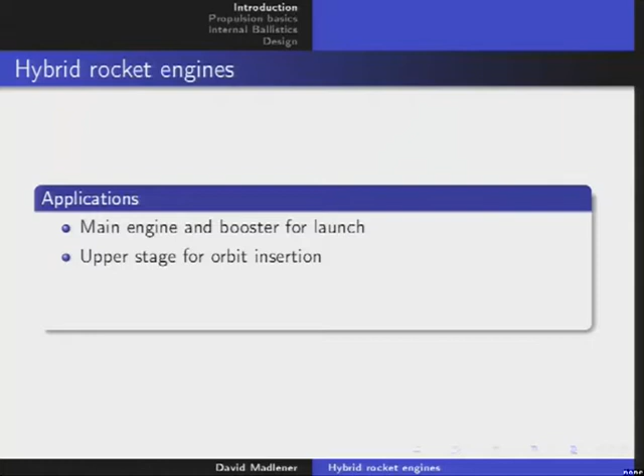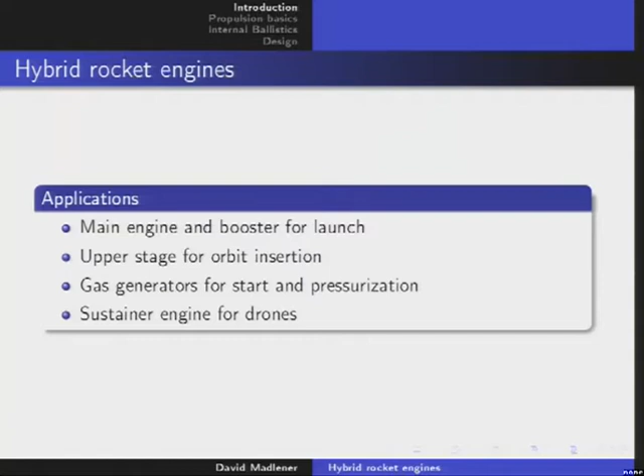It could be used for upper stage, for orbit insertion. It is often used as a gas generator, to start another engine or to pressurize tanks, and sometimes even as an extinguisher. Very important today in the military or for amateurs, for unmanned aerial vehicles, it is used as a sustainer engine for drones because it has a very long burn time and you can throttle the engine.

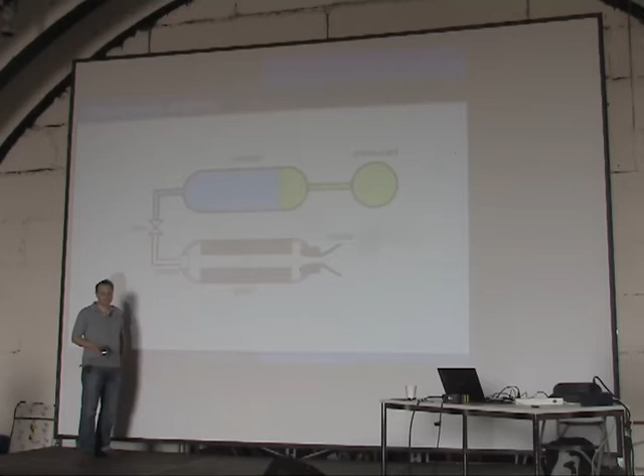So the main part of the hybrid rocket system is the burning chamber, then there's a valve. The valve has to work at cryogenic temperatures if you are using cryogenic fluid, so this is the difficult part. If anybody remembers, Copenhagen Suborbitals launched their Heat 1X this summer, and the previous summer they tried - the main problem was that the valve didn't open because it was frozen. This happened to us too.

Then we have the oxidizer container - that's normally a fluid like liquid oxygen or something like that, and then we have the pressurant. So if we build an engine, we have to feed the liquid into the burning chamber at a certain pressure - normally the higher the better. The problem is, of course, that you have to somehow put pressure on this liquid, and there are two ways to do that: you can use a pump, or you can pressurize it by a gas. So this is the main principle.

This is very simple. If you use a pump, the pump assembly would be here, and it would be the most complex thing, so amateurs normally tend to use normal pressurization by gas.

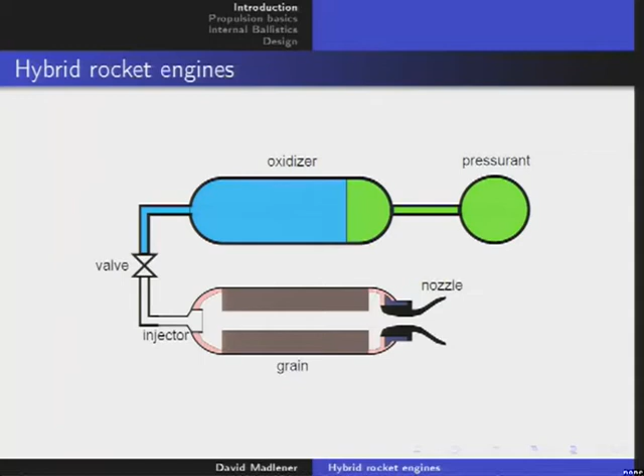Okay, that's the principle. So what are the pros of this design? There are many pros. First, it's inherently safe. That's something really nice - hybrid rocket engines cannot explode by itself, like for example solid engines, and they don't do hard starts like liquid engines, and they don't burn up in flames and devastate everything, your test stand and even people, if you use the right oxidizer.

There was an accident with - what's the name - Scaled Composites, where they used nitrous oxide, and this is a monopropellant, and they did something wrong. There was some cavitation and it exploded, and I think 2 or 3 people died. But normally, hybrids are very safe.

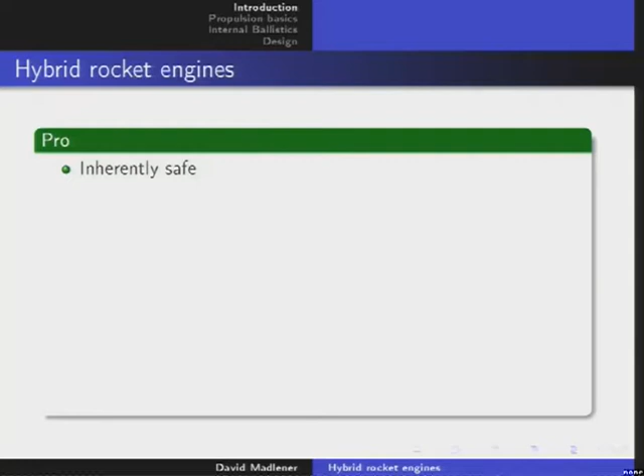So it's environmentally clean if you don't add any strange metals like beryllium or something like that to the mix. It's a proven technology - as I said, there were applications trying to make a launcher, and it was working. And it has been researched since the 1930s, so it's nothing new.

The grain is very robust, so it doesn't matter if there are cracks or bubbles inside, unlike a solid rocket engine where you have to take very much care about looking at the structure of the grain, with X-ray or so. In hybrid engines, the grain could have bubbles or cracks, it doesn't even matter. So that's the feature why it's inherently safe.

It has medium ISP, between 150 and 300. You can go a little beyond that limit, but you have to use very exotic oxidizers and fuels. It has easy throttling, you only have to throttle one liquid, as opposed to bipropellants, where you have to change two liquid streams, which is much more complicated. You can shut down and restart the engines easily, compared to solid engines that are very difficult to restart and shut down. And it has reduced complexity and low cost compared to bipropellant engines, because the feed system only has to transport one liquid, and you don't need mixing aggregators to mix two propellants.

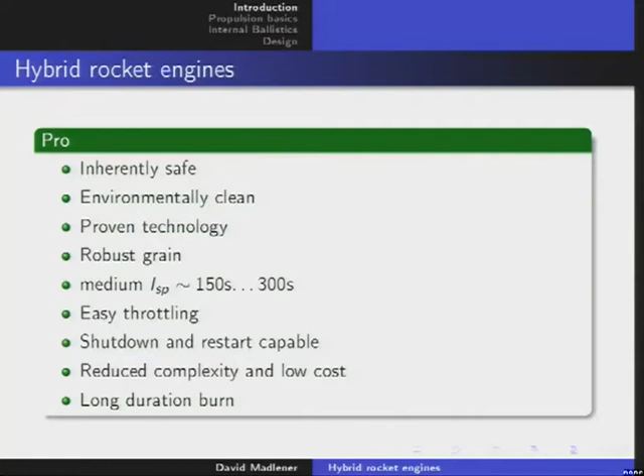Another feature is it has a very long duration burn, and that's why it's used in test drones in the military and for UAVs. You can burn for 20 minutes or so if you want to, or longer.

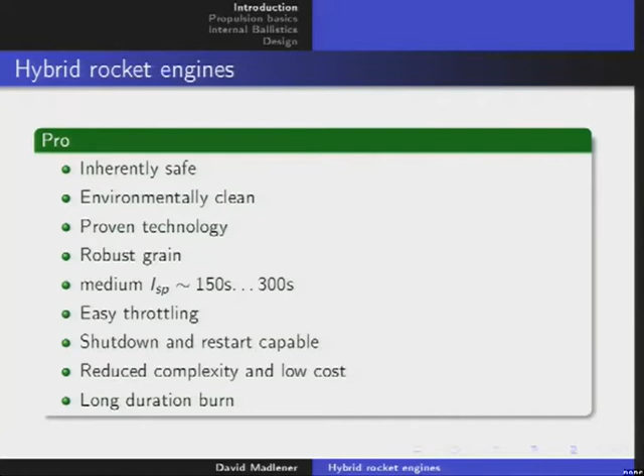So there are some drawbacks. If these drawbacks weren't there, they would be using hybrid engines now, but they don't. So why don't they use it? Well, there's one problem, low regression rate, that in turn brings the very long duration burns. But if you want a very short burning time, so a lot of thrust, then you have a problem. But you can counteract it.

One way to counteract this is to use multiports. The second way is to use special fuels that have a very high regression rate because they have low viscosity when they melt, like paraffin. So there are additional effects that transport the fuel into the burning chamber.

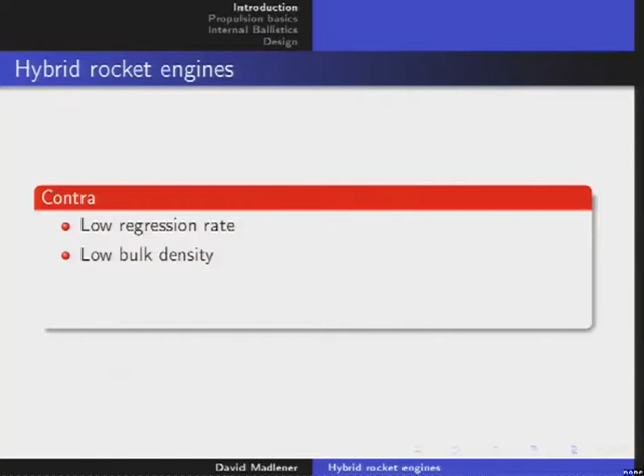It has low bulk density. That means a hybrid rocket engine is normally very large. You cannot build very small engines like bipropellants. So they are always 1-2 meters long because they need the mixing time. That's due to the process of burning.

And they normally have a low combustion efficiency, a few percent below bipropellants, but they are better than solid rocket engines. To improve the efficiency, you have to add certain mixing elements like diaphragms, to make something like an afterburning by producing vorticity. And this adds additional weight to the system, so you have to build it bigger.

Another problem is the shifting O/F ratio, that is the ratio between oxidizer and fuel, because as the port increases in size, everything changes. The working point of the engine changes, and you have to counteract it by controlling. But with today's electronics, this shouldn't be a problem. So these are the main drawbacks used against hybrids, the real reasons they aren't in wider use. If you want to make a working system, you have to address these four points.

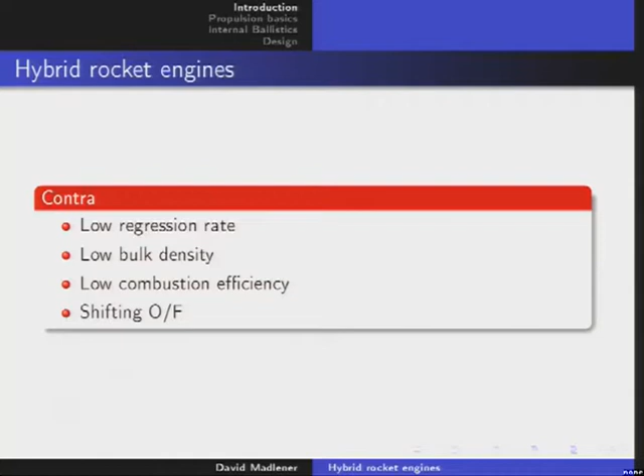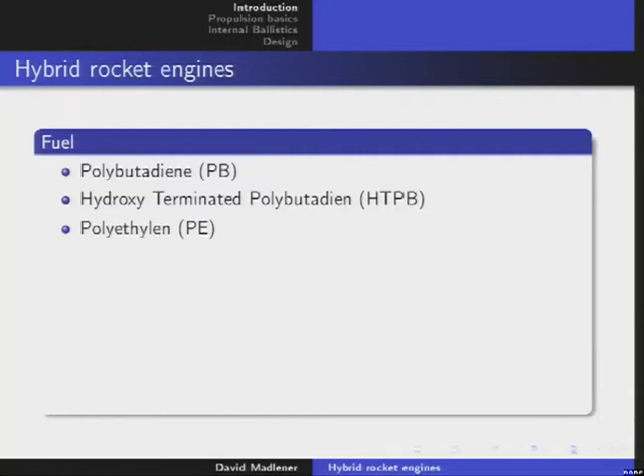So let's look at the fuels normally used. You can use any polymer, but one of the first, when they were available, was just rubber, polybutadiene. Today it's mostly HTPB, hydroxy-terminated polybutadiene, which is just a more viscous, faster burning rubber. But you could just as well use polyethylene, we use that too, amateurs like to use that. The problem with polyethylene is that when it melts, it expands, so it deforms. Then you could use polypropylene, which is nearly the same.

What's very nice is to use PMMA, polymethyl methacrylate, which is transparent, so you can watch the burn while it's working, and estimate parameters in the burning chamber by optical inspection. Then what we used was polyurethane, nasty stuff, but very easy to process. Then some amateurs use PVC, polyvinyl chloride, which is really nasty because it produces chlorine exhaust, but is readily available in every hardware store.

A very good propellant that some guys in our group investigated too is paraffin, or you can use very long alkanes, asphalt for example. This gives a very high regression rate, so you can get very high thrust even using one port, reducing the complexity of the engine.

A very exotic fuel is pure lithium. There was a program in the 60s, beginning of the 70s, where they used a pure lithium grain together with FLOX, and it achieved, I think, a vacuum ISP of 380, nearly that of a good bipropellant.

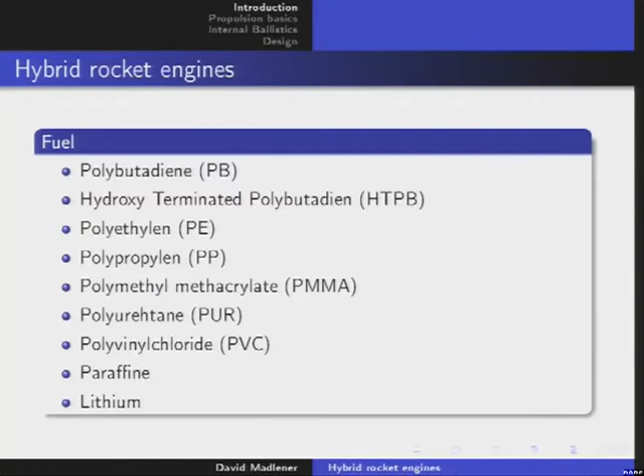So what oxidizer is normally used? Well, we use liquid oxygen, and it's, in my opinion, the best oxidizer there is in the world. But there are other opinions.

You can use gaseous oxygen, but this is only for test stands because the density is too low for the engine to work in a real application. Most amateurs use nitrous oxide.

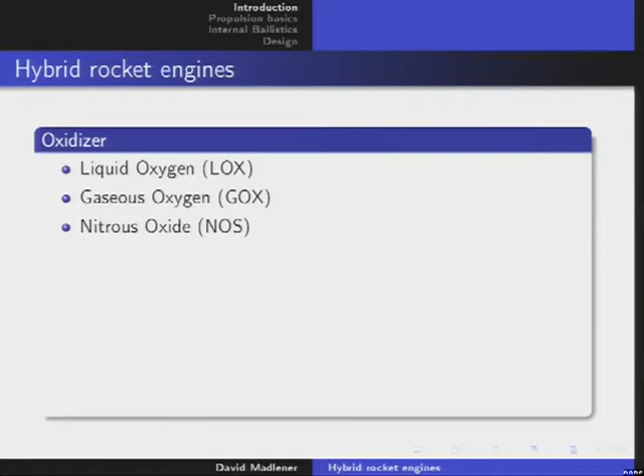As I said before, nitrous oxide is a monopropellant, so you have to be very careful about your injector design and feed system, not to create conditions where cavitation could occur, because this stuff can blow up with no notice, just blow up.

Then there is a very interesting substance called red fuming nitric acid that you can only use with a bunny suit, a moon suit, otherwise you get burnt. You have to use a gas mask. But otherwise it is a very benign substance, so it doesn't explode by itself. It just burns everything in contact.

And this one produces nitrous gases, so it's red fuming. It looks like it's coming directly from hell. This one is not so dangerous in the sense that it doesn't produce so much fumes, but this thing corrodes everything. So you put it in anything that's not specially suited, like with Teflon or so, and it will corrode everything.

Hydrogen peroxide is a very interesting oxidizer, true. The problem with hydrogen peroxide is that it has a lower specific impulse because it produces water in the process. But it is very, very nice as a monopropellant. And there are guys that use hydrogen peroxide for hybrids.

Then there is dinitrogen tetroxide. This is normally used for military applications. It's a storable compound, a liquid gas like nitrous oxide. It's very similar, it's just adding two atoms together. And it's what makes the red fuming nitric acid red, essentially.

Then we have liquid fluorine, which is something very, very, very nasty, and you don't want to work with it, but they did. And even worse, liquid fluorine plus oxygen, called FLOX. As I told you, this FLOX was used with lithium to produce a hybrid engine that achieved about 380 seconds in the 1970s.

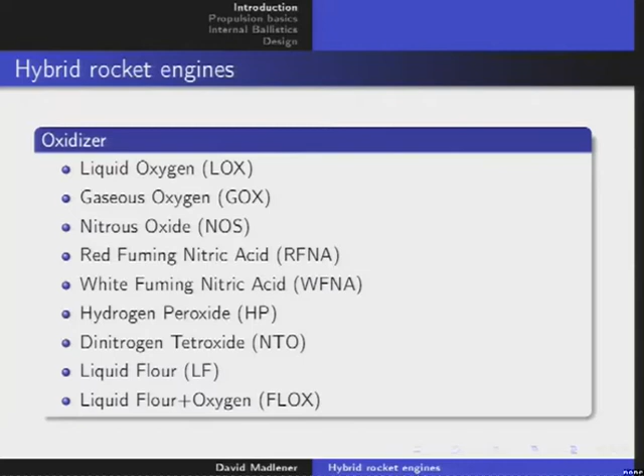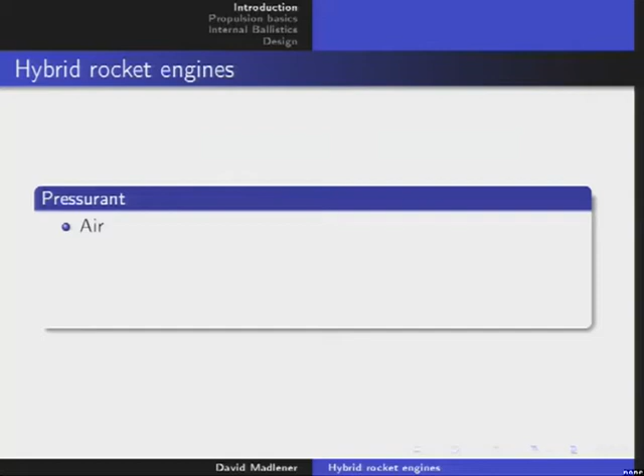Then as for pressurant, there's not so much choice. Normally you can use just air, compressed air. The problem is that compressed air contains oxygen, and if you let it flow through a feed line where there's some inhomogeneity, some crack or something like that, you can have an adiabatic shock. At that point, it heats up and just ignites, and then you have a nice burning facility.

So it's better to use nitrogen. It's totally inert, it's very cheap. The problem is if you work with cryogenic oxidizers like LOX, then the nitrogen will go to the liquid phase, so you have to put a lot of nitrogen in it.

Then you could use helium, which is normally the best choice. The problem with helium is it's very expensive, and it goes through everything, so you cannot store it for a long time. You should just buy it and use it up in a short cycle, otherwise maybe only half of the helium you bought remains.

What's very interesting is that there are people who use helium together with oxyhydrogen. Oxyhydrogen as a pressurant is somehow crazy, yes? But there are guys in Switzerland, SPL, and they take oxyhydrogen in a concentration that isn't explosive, very low concentration, and then they take the helium and expand it through a catalyst with the oxyhydrogen, so this reaction takes place, produces water and a lot of heat. So the helium is heated and you need less helium than just pressurizing it with room temperature helium.

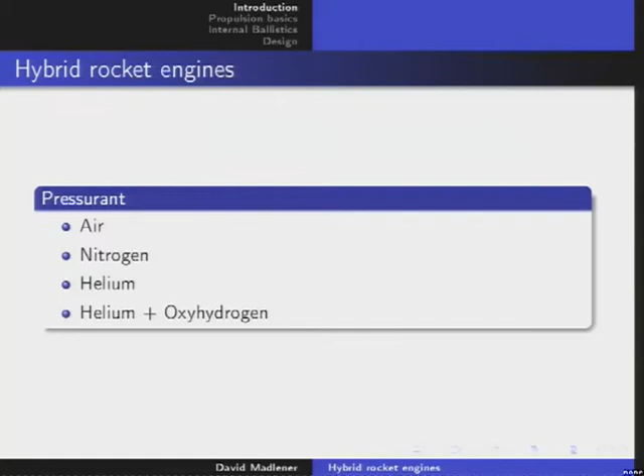Okay, so let's talk about the grains. Normally, you just use a circular port. This is the simplest port, just a hole, and it's like an inverse flame inside, like a candle, but burning from inside instead of using some string.

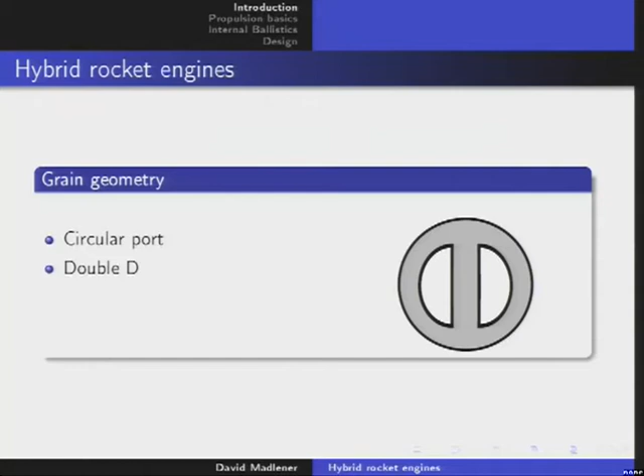Then there is the double port design, typical, so the double D. If you want higher thrust, you have to add ports, which of course makes the injector more complicated. Then the 4-port, and of course the so-called wagon wheel.

This was the design AMROC used for their launching vehicle. The problem with these wagon wheels is when they burn up, these hollow regions expand until they touch, and then you are left with a web. At this point, you have to shut off the engine, otherwise the web itself will start to deteriorate, to burn up.

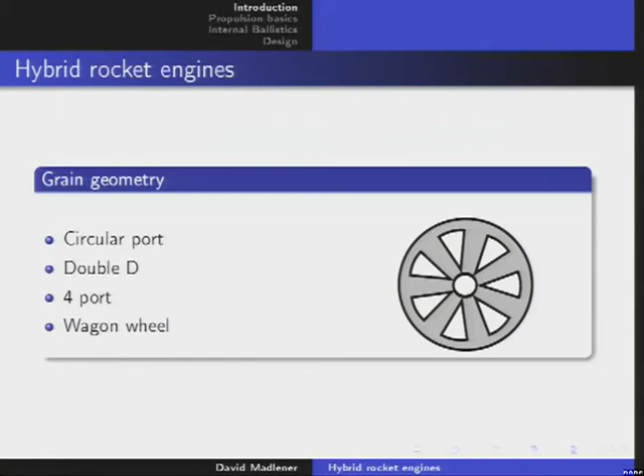And then small pieces will go to your nozzle at a speed of approximately Mach 1, so 1,000 meters per second or so, and will destroy the throat of the nozzle, thereby changing the flow, changing the working point, everything, and then deviating the rocket. So this is not a nice thing to try. These are the problems you have if you use fuel webs for multi-ports.

So now let's talk a little bit about propulsion basics. This is very basic stuff, and some of you may have heard it already.

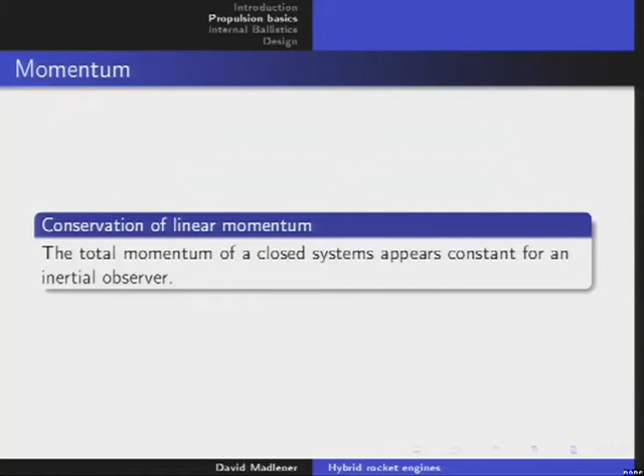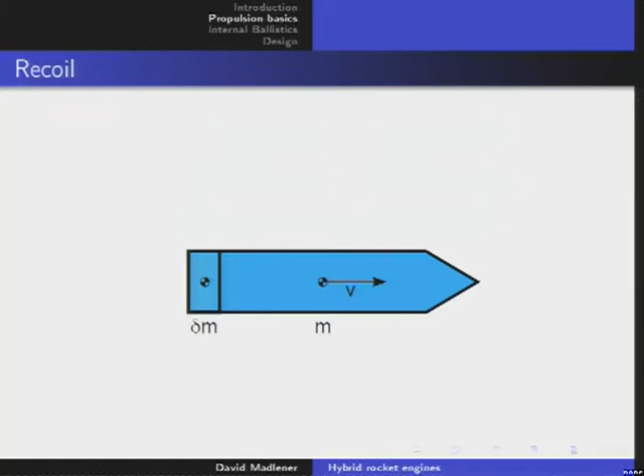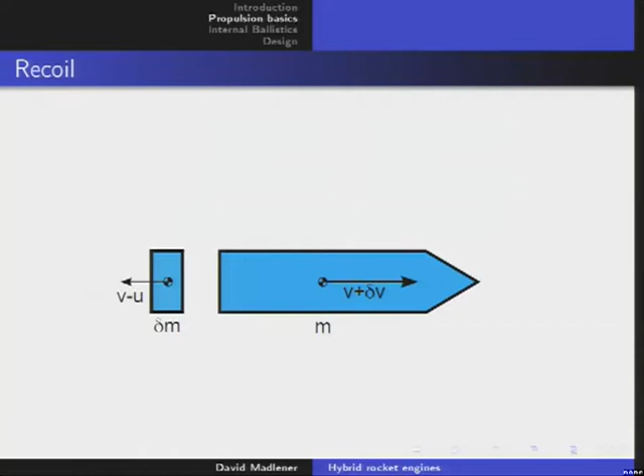When we look at a rocket, what we really use every time is the so-called conservation of linear momentum. For an inertial observer looking at some system where no external forces are working, this system has a constant momentum. So if you look at a rocket in flight with velocity v, we have two masses, the mass of the rocket and some small mass delta m that is ejected in a short time frame delta t. Then the momentum before the ejection and after the ejection has to be equal. So you can write down a little equation: on the left side, the momentum before the ejection, and on the right side, the momentum after the ejection.

You divide it by the time needed, delta t, and then you integrate it. On the right side, we have just the derivative of time of velocity integrated, and it gives us the difference in velocity between the start and the end of the burn. And here we have something more difficult: this is the so-called logarithmic derivation.

So when integrated, we get the natural logarithm in front, and we arrive at the celebrated Tsiolkovsky formula, which is the most important formula for mission planning. For every mission you want to accomplish, there's a certain change in velocity the rocket has to achieve to perform the mission, and it's called the delta V.

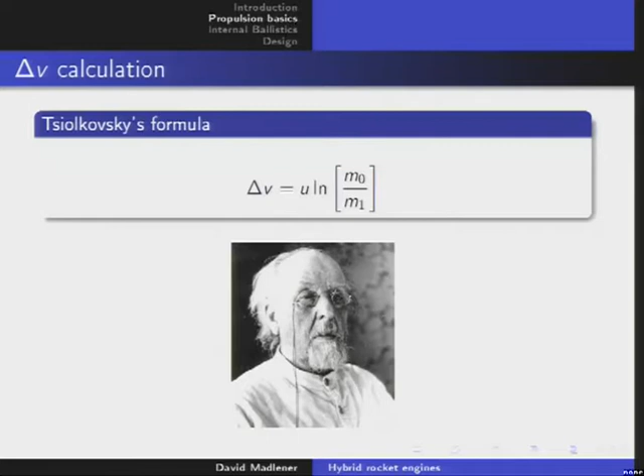So the delta V, as Tsiolkovsky found out in the 1800s, is proportional to the so-called effective exhaust velocity. This is the velocity that you propel the fuel, the burn gases, out of the rocket, behind you. Then there is a logarithm naturalis of the mass ratio. So the idea is first to propel the exhaust gases as fast as possible away from the rocket, and second, at the end of the burn, to be as light as possible, so you get a very high mass ratio.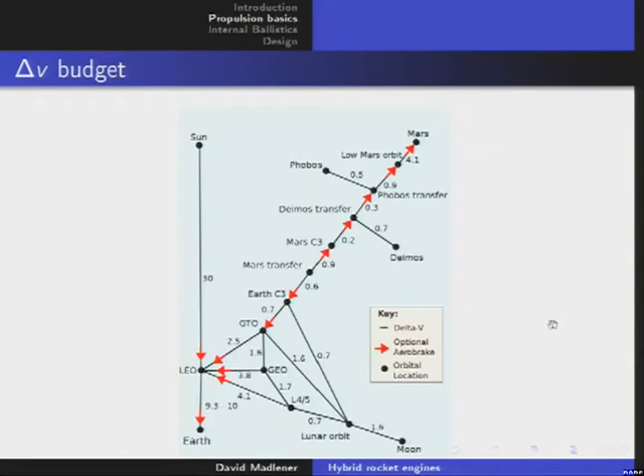And then if you want to go up from the moon, 1.6, and let's say we want to go to Mars, then we need about 3 to 4 kilometers per second, and the rest could be done by aerobraking. So to go from the moon to Mars is about one-third cheaper than going from Earth just to low Earth orbit. So it would be logical to first build a moon base, construct the spaceship there, and then go to Mars. It would be much faster, and the ship could be much bigger and take much more with it. And of course, they're planning on it.

necessary of about 100 or so to go to the moon. So it would not be possible to build one stage rockets to go to the moon. But by staging them, like in the Saturn V project, you can effectively add the logarithms, and you get

at least the mass ratio of the end configuration compared to the start configuration. So for example, for the Saturn V, the start configuration was in the order of over 3,000 tons, so M0 was about 3,000. And when it got to the moon, I think it was down to 40 tons or so, so you have a mass ratio of about 100. And then you get enough delta V to get to the moon and even back.

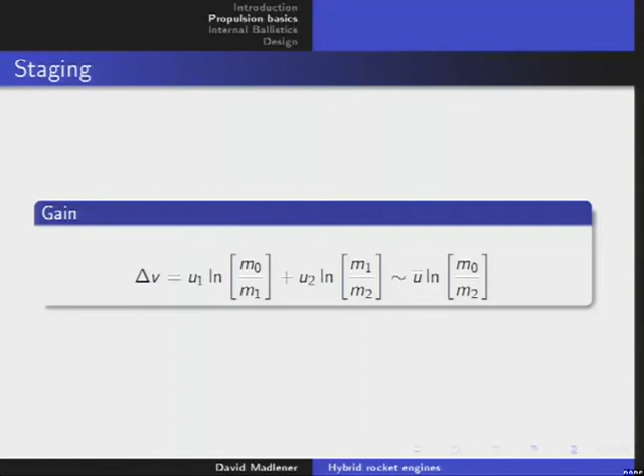Okay, let's talk a little bit of thermodynamics. This is necessary because I want to show you some formulas that contain a lot of signs that are very difficult to understand if you haven't seen them anywhere else.

So there are two laws in thermodynamics. The first law is: you can't win. And the second law is: you shouldn't even try. So the first law is about the inner energy that can only change by adding heat to a system or work, or extracting it to reduce the inner energy. And the second law states there is some strange state variable called the entropy, and it's somehow connected to the heat flow at a reversible process.

Okay, so energy and temperature. You may have heard about the Boltzmann constant - every physicist knows about it. It's a very small number, 10 to the power of minus 23. What it essentially says is, if you have a molecule or an atom at a certain temperature, let's say 300 Kelvin, room temperature, then you can calculate with this constant the mean energy per degree of freedom. Degree of freedom means the way a molecule can move, let's say in direction of X or Y or Z, or it can rotate around an axis. So for example, for a diatomic molecule, you would have 5 degrees of freedom, so you could calculate that one single molecule would have in the mean 5/2 kB T.

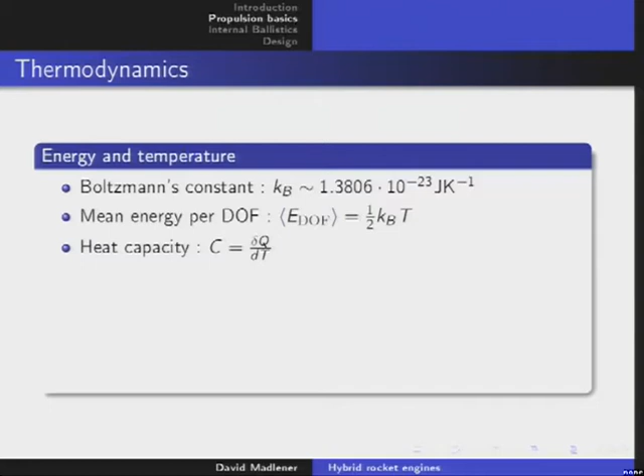So then there's another notion, very important: heat capacity. This is just, if you take any system, let's say this glass of water, and you want to improve its temperature, then you have to put some energy in it. And the heat capacity just says how many joules you have to put in to increase the temperature by 1 Kelvin. That's heat capacity.

So if you do it at constant volume, like for example doing it in a cylinder, then it's the heat capacity at constant volume. There's a very nice entity called the enthalpy, which is just the Legendre transform of the inner energy, and this leads us to the heat capacity at constant pressure. This is something that normally takes place in our environment - if you heat something, it always happens at ambient pressure, at air pressure, so it's at constant pressure. So what you normally measure is the heat capacity at constant pressure.

And there is something called the adiabatic index, gamma, or sometimes called kappa in the formulas, and it's just a ratio of these two heats. It's a number that is close to 1, always a little bit higher, so between 1 and 1.666. This is a number that is always used in rocketry equations, so don't be alarmed - it's a very simple number to understand. It's just some small number between 1 and 1.666 that describes the constituents of the gas that is exhausted.

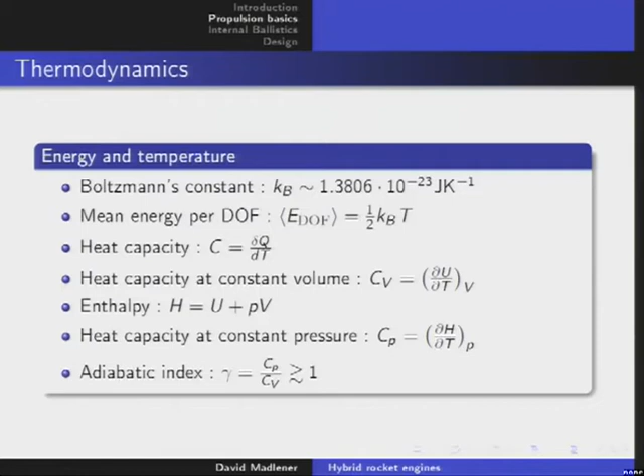So also, some chemistry - molar and specific quantities. There's Avogadro's number, which is just the chemist's way of saying a dozen. Yes, a dozen is a small number, 12, and Avogadro's number is just a larger number, but it has to do with 12, because per definition, the Avogadro number is the number of atoms in the isotope C12 if you have 12 grams of it. Very funny. So this is a very, very high number, and if you multiply it by our Boltzmann constant, which has nearly the same order of magnitude just in reverse, you get a small number, about 8, and we call that the universal gas constant. So just remember, R is in the vicinity of 8.

Then we have the amount of substance, just taking all the molecules and dividing it by this number. So instead of saying I have 12 times 10 to the power of 23, you say I have 2 moles. It's just like saying when you have 24 eggs, I have 2 dozen.

Then you have the molecular weight, very important for the formulas that will come. It's just the weight that 1 mole of the substance has. So you take 1 molecule, look at its weight, and multiply it with Avogadro's number, and you get some number in the region of grams. So for example, water, made of oxygen and 2 hydrogen, is 16 plus 2, so 18 grams per mole. So if you have 18 grams of water, there are about 6 times 10 to the power of 23 molecules in it.

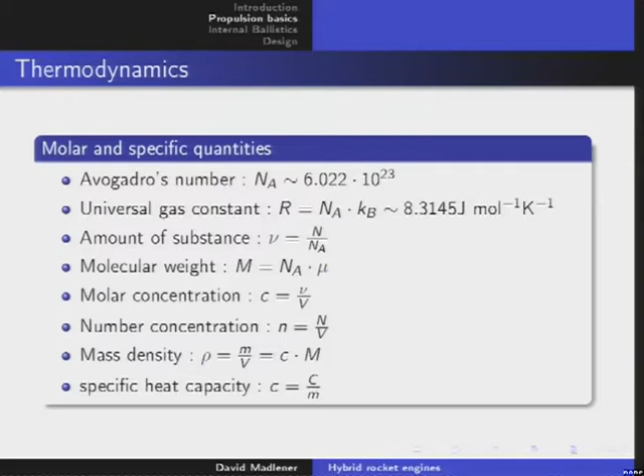So we have the molar concentration, this is just how many moles in a liter. Then the number concentration, how many molecules in a liter, the mass density, how many mass per liter, and the specific heat capacity is just taking the heat capacity of a system and dividing it by its mass.

Okay, so then something very important, the so-called velocity of sound. It's a very simple formula, and here we see for the first time the adiabatic index. For example, if you want to calculate the velocity of sound here in air, you put in the temperature that we have now, let's say around 300 Kelvin, then divide by the molar mass of air, I think it's in the order of 28 grams or so, and multiply it by gamma of air, which is in the order of 1.4.

And multiply it with 8.314, and take the square root, and you get about 340 meters per second. So if the temperature rises, the speed of sound rises too, so in a hot gas the speed of sound is higher. If the molecules of the gas are heavier, the speed of sound is lower, because the molecules have to be pushed around and they are heavier, so they don't want to be pushed around.

So if you take hydrogen, you'll have a very high velocity of sound, and if you take, for example, xenon, then it's very low. So for example, if someone breathes in helium - it's very high, you can also take hydrogen but it's very dangerous - so if you take helium, you have a very different sound.

They go up, they gain, and that's because of this velocity of sound, it changes. The velocity of sound in helium is much higher than in air. And if he breathes in xenon, then he gets a very low voice, because the velocity of sound is so much lower.

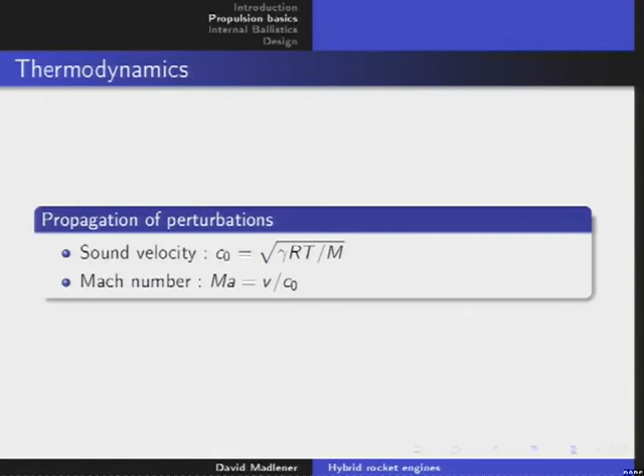Okay, let's talk about the ideal gas. I have a nice metaphor for it. Just imagine that you have N hooligans, and they are confined to a space V, and you make them angry with a temperature T. Then they will exert a pressure p on the environment.

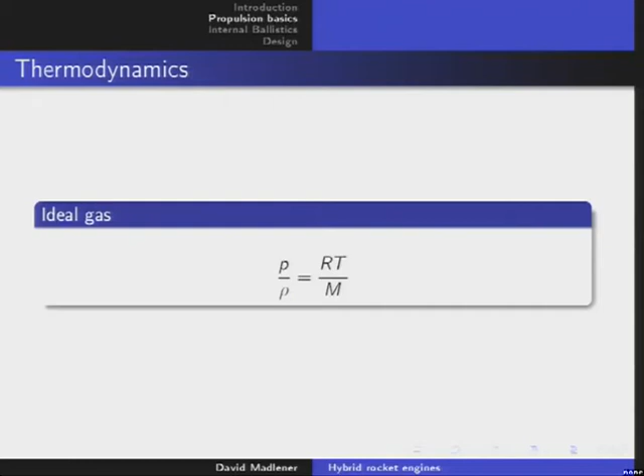So you just can divide it by V, then you have the number density of the hooligans, or you can divide it by Avogadro's number, then you have something that chemists like, the molarity, or divide by V, then you have the concentration, the molar concentration. And what is normally used in rocketry is this equation. So if you come around this equation, it's always the ideal gas, all the same. In this case it's the density rho, and the molecular weight m is now introduced.

So what are the properties of ideal gases? Well, we can calculate the adiabatic index because it's just given by the number of degrees of freedom plus 2, divided by the number of degrees of freedom. So if we have, for example, a diatomic gas, like in air, nitrogen and oxygen mostly, then the number of degrees of freedom is 5: 3 for the translation and 2 for rotation. So 5 plus 2 is 7, divided by 5 is 1.4. It's that easy for an ideal gas.

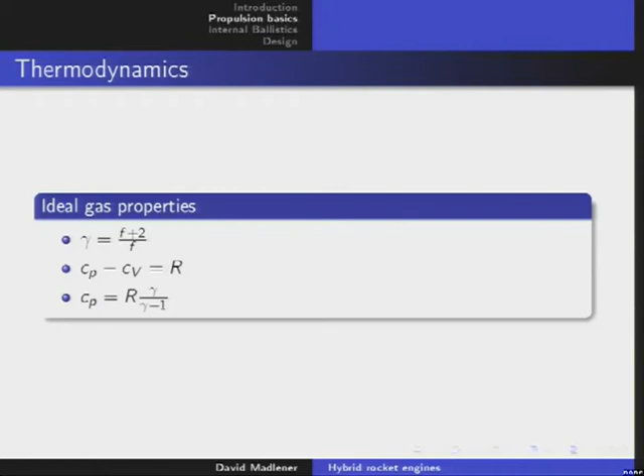Then the difference between the two heats at constant pressure and constant volume is just R, also 8.314. And you can even directly calculate Cp. That's very important because if we do gas expansion, which is what we're interested in with the nozzle, we can simplify things and get exact analytical expressions that we can just calculate, and then get the properties of the engine.

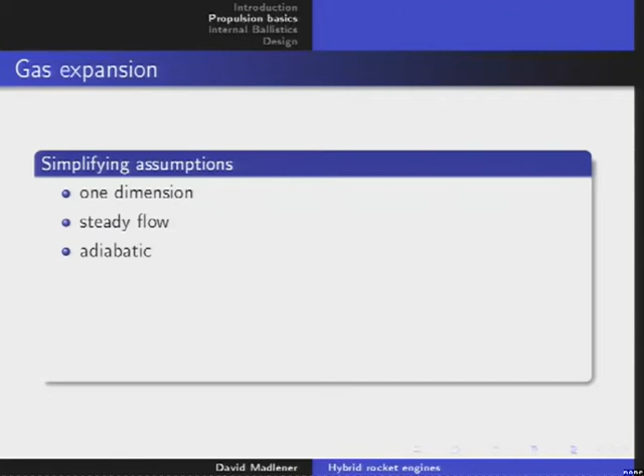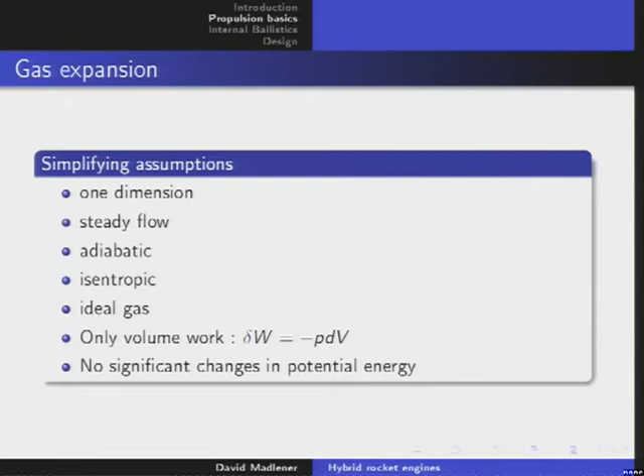So the simplifying assumptions are one-dimensional flow, steady flow with no change over time, adiabatic with no flow of heat, isentropic, and ideal gas. It's done only volume work, so the gas expands and works against the environment. And there are no significant changes in potential energy because our engines are normally so small that they are negligible.

If you do that, you get one constant of the motion of the gas, called the stagnation enthalpy. What you have to know is just that it is constant, and it changes with the speed that the fluid travels. So if you are at the stagnation point, this red point on an airfoil, the flow stopped here.

And everywhere else, when the speed gets up, then the enthalpy goes down according to this law. Interestingly enough, for an ideal gas, you can calculate the enthalpy by just multiplying the absolute temperature with the heat capacity at constant pressure, and we have seen that we can calculate this.

So this is an interesting formula because you can calculate the temperature T0 at the stagnation point, knowing the ambient temperature around it—for example, 300 Kelvin—and the velocity that the air is streaming. So if you have a foil, you could calculate the temperature at the stagnation point, or more interestingly, for rockets, you can calculate the temperature at the tip of the rocket.

You can see if V gets very high, let's say Mach 3 or higher, the temperature goes beyond 500 Kelvin, 600, 700, 800 Kelvin, so you cannot build tips out of aluminum, for example—it will just melt away. With this formula, you can calculate this, and you can calculate all the formulas I will show you now. This is the basis for all the formulas for one-dimensional flow in rocket engines.

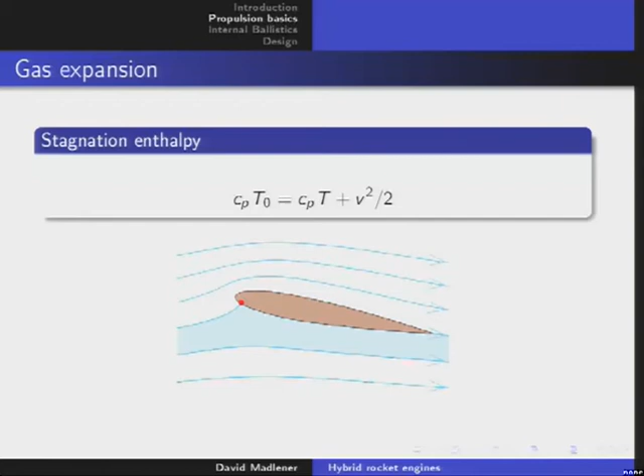So now, to the so-called de Laval nozzle, the convergent-divergent nozzle. This is the one piece of engineering that produces the most power on Earth. With this simple device, every normal power plant produces electricity—by expanding hot steam to very high speeds, you turn the turbine and then produce electricity. And of course, it is used in rockets, which are the most sophisticated and most powerful engines ever built.

So what happens is that hot gas enters the convergent section, then it speeds up, and exactly at the throat it reaches Mach 1, the local velocity of sound. After exiting the throat region, it accelerates even more and achieves supersonic velocity, maybe Mach 4 or 5 or so—the effective acceleration of the gas.

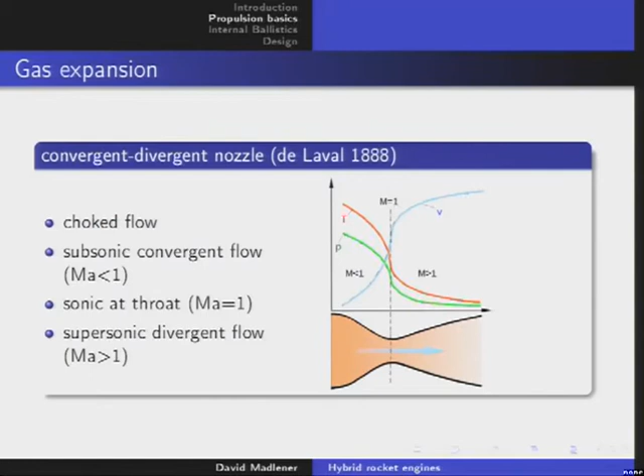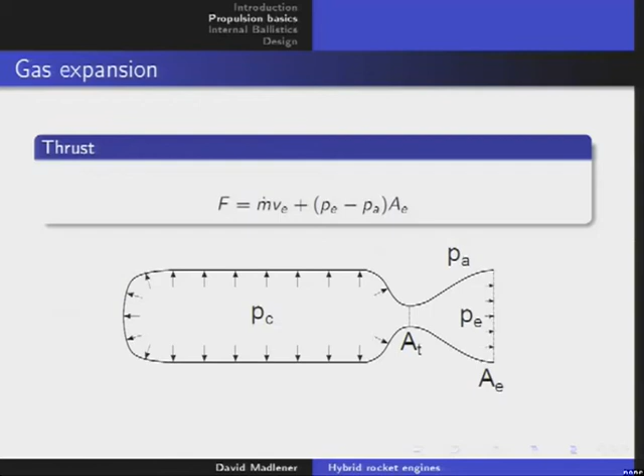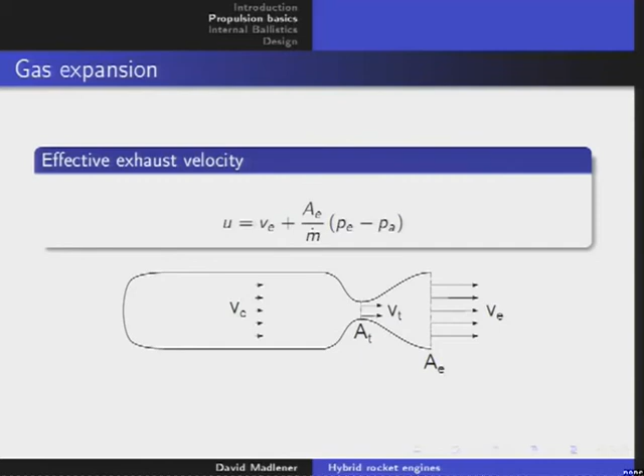So from this, just by dividing by m-dot, you can calculate the effective exhaust velocity that we had in our Tsiolkovsky equation. Very importantly, with this effective exhaust velocity, you can calculate the specific impulse of the engine, the one number that defines how efficiently the engine can accelerate the gas. It's measured in seconds, and normally in a range between 100 and 450 for the best engines.

So this is actually an equation from around 1850 or so, very old. It describes the exit velocity depending on the stagnation temperature, the molecular weight of the gas, the universal gas constant, the adiabatic index, the pressure in the chamber, and the exit pressure at the nozzle. If you enter everything, you get the velocity at the exit of the nozzle. And if you look at this formula, you see it's proportional to the local speed of sound in the burning chamber—so the higher the speed of sound in the burning chamber, the better.

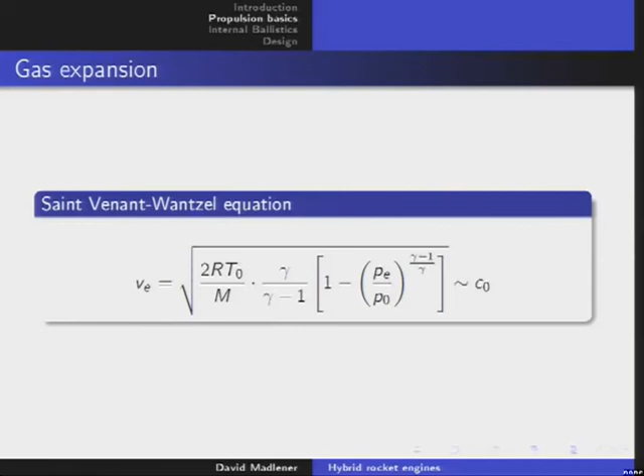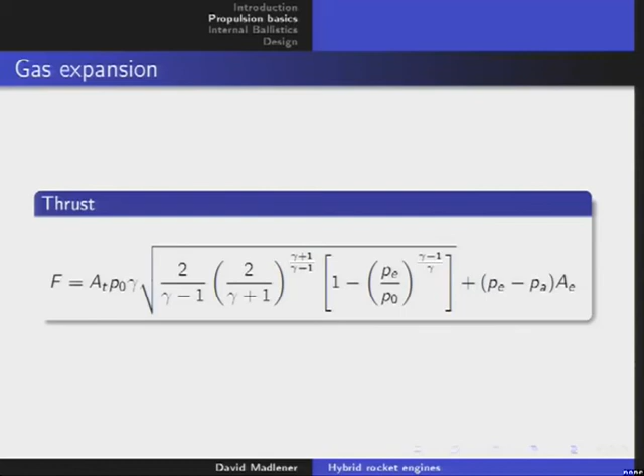So if you enter everything and you get this nice equation, I won't go into the details. This is just a thrust equation. You just take this formula, put everything in, and you have an estimation of what the thrust of your engine will be. And this is important, as we will see soon, that you know what the thrust is before testing.

Okay, let's talk a little bit about hybrid combustion. The main feature of hybrids is the so-called diffusion flame. So in solid fuel engines, the two propellants, the oxidizer and the fuel, are mixed so intimately that they directly react at the burning front. So there is normally not much reaction in the gas phase except if you have metals. In the bipropellant, you mix the two propellants by impinging them or something like that, and then they burn up in little droplets in flight.

So in a hybrid combustion, you have a diffusion flame, and it means that the fuel is gasified during the reaction. And you have turbulent mixing between the two layers. This is fuel-rich, this is oxidizer-rich, and this is the flame front. So you have mixing between them. You have here blowing away from the wall.

And this here, due to the very high velocity of the oxidizer, you have normally a very high Reynolds number, so it's a turbulent flow, hopefully. So the reaction takes place in a very small layer, the flame layer, where the two have the correct stoichiometric ratios. And it's nature's way of burning things. So if you look at the candle, you are looking at a diffusion flame. Okay? It's just the same thing in principle.

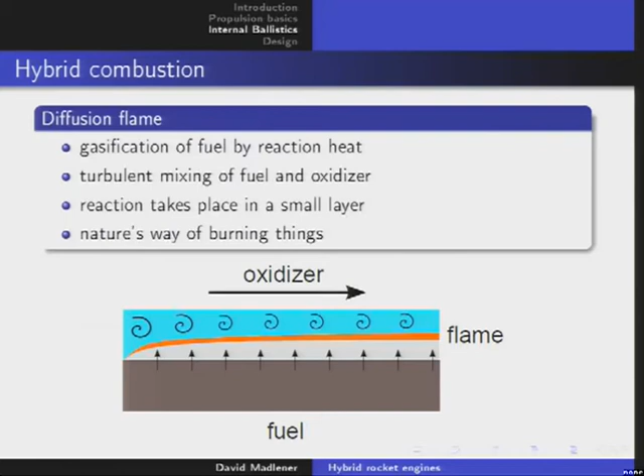So now to the burning rate, which is the dominating parameter to estimate the thrust. So you have heat flowing from the flame front down to the fuel, and we call it here Q for the wall. This is the heat that flows into the wall from the flame. And on the right side of the equation, we have the amount of fuel that evaporates per second times its enthalpy of evaporation. So there's a certain kind of energy needed to transfer the fuel from the solid phase to a gaseous phase, or mainly first to a liquid phase and then to a gaseous phase.

And this is the main feature why hybrids are inherently safe. Because if anything goes wrong, then normally the pressure in the chamber drops, the flame goes out, and no more propellant will be evaporated. And there is no intimate mixing of oxidizer and propellant possible, like for example in bipropellant engines, when there is some fault and these two things get together, like for example kerosene LOX or hydrogen LOX, then there's a very nice fireball, but only from the far, okay? So you're standing near to it, that's it. But with hybrid engines, they may blow up, but then it's over. There will be no explosion.

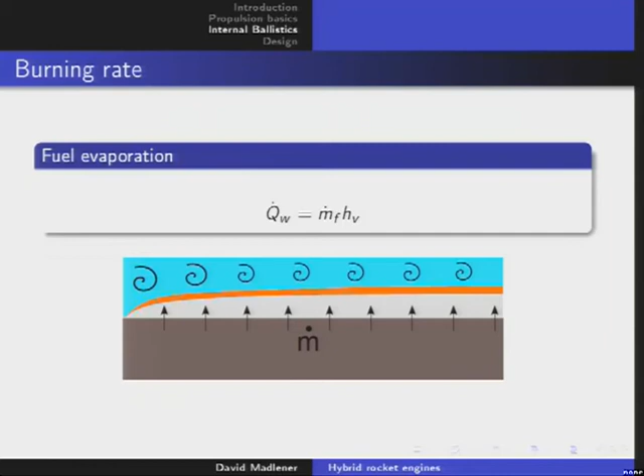So the heat transfer is calculated by this equation, and it's very complicated. I won't go into the details. You have to look at the turbulent boundary layer, gas conductivity, the temperature distribution across the burning chamber. You have to know the specific enthalpy of the gas, so you have to do some thermochemistry to know what the combustion looks like. And of course, you need the specific heat of these burning gases.

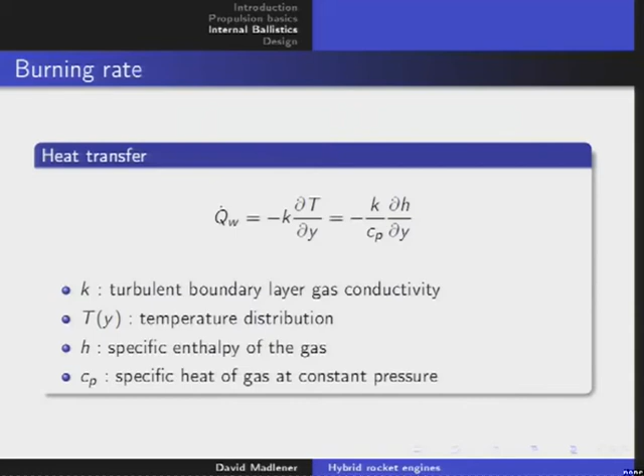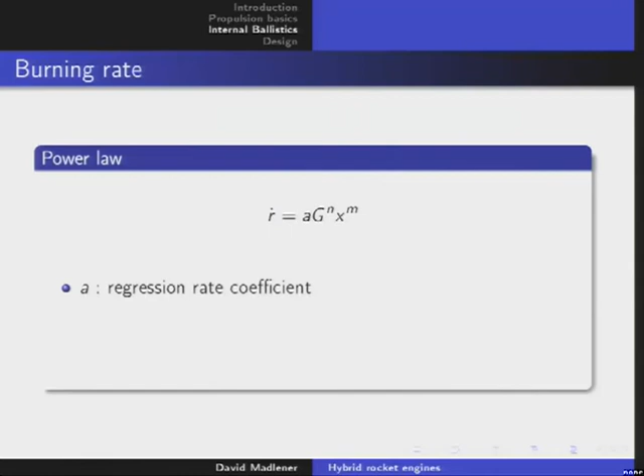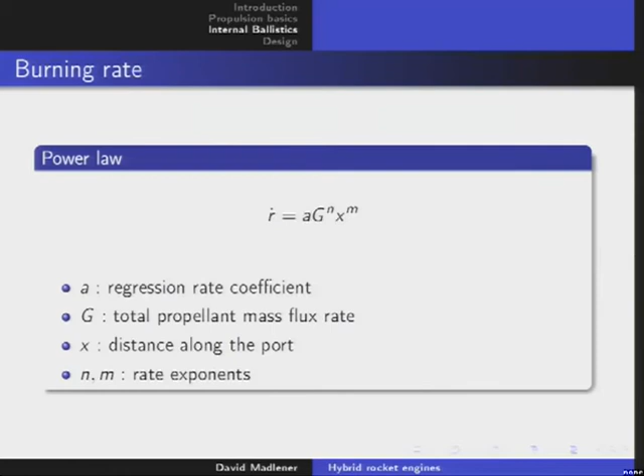So when you do all that, then you get at this equation that describes how the burn rate goes. So R dot is the amount of length that the grain loses per second, so some millimeters per second. And it is calculated by a power law. And this power law contains a regression coefficient. G is the total propellant mass flux rate along the port, and X is the distance along the port. So you need two exponents, n and m, and they are on the order of 0.8 for n and minus 0.2 for m.

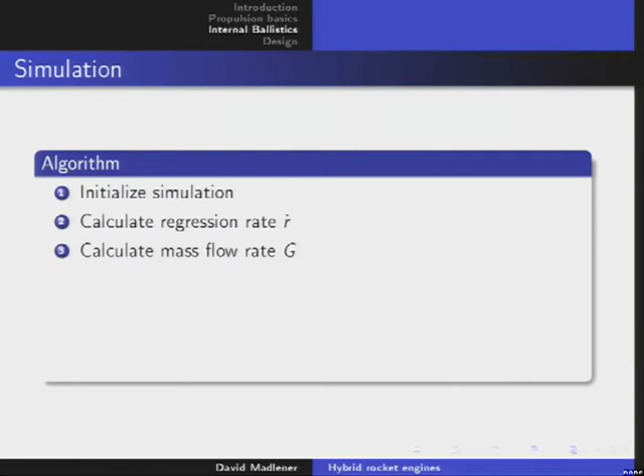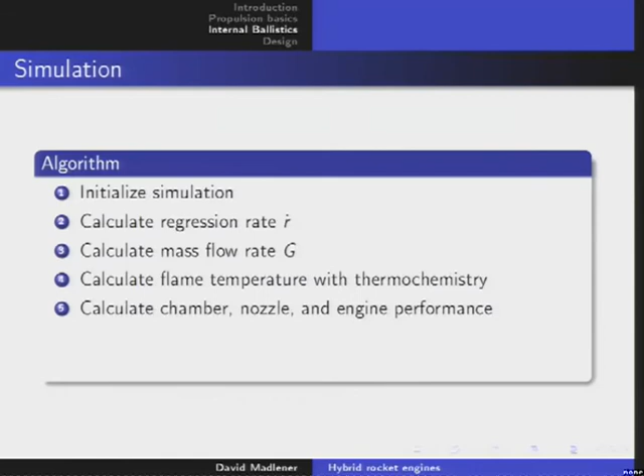Okay, and then of course you can simulate it, and you just initialize simulation and calculate the regression rate with this formula. Then you calculate the mass flow rate by knowing how much oxidizer and fuel is now in the burning chamber. Then you calculate the temperature using thermochemistry. And you calculate from that the change in the chamber, nozzle, and engine performance. And update, of course, the grain is slightly changing, the port diameter is increasing, and the nozzle may be increasing too, but because there's ablation.

And if not all fuel has been spent, you just start over and repeat it until you have done the simulation. So that's how a simulation of a hybrid rocket motor is done.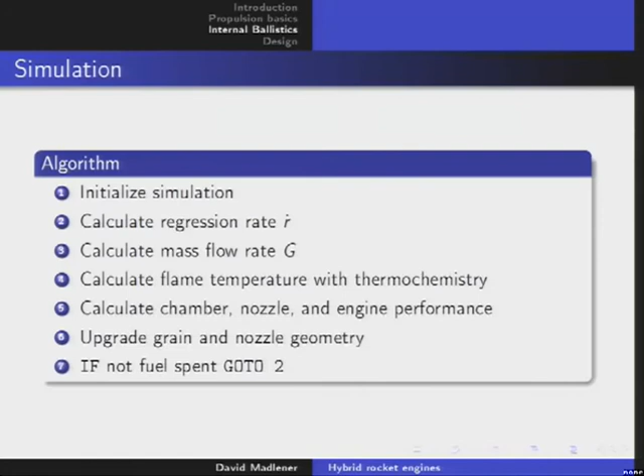So I will now talk a little bit about the design work we do, especially on the so-called Advanced Lithergol Propulsion Hybride Aggregate we worked on. This is a drawing of it, and it had a graphite nozzle, and it was totally decomposable.

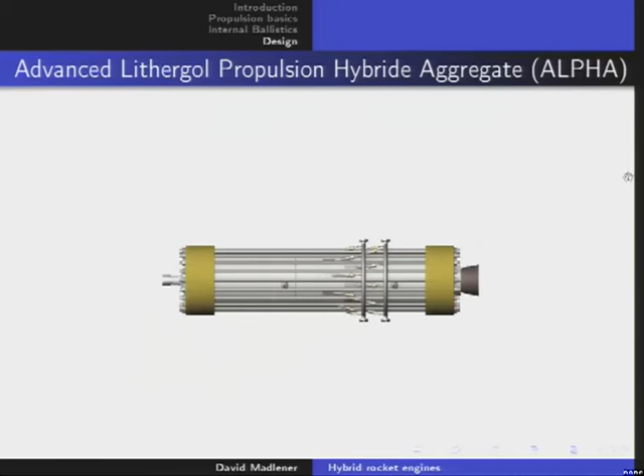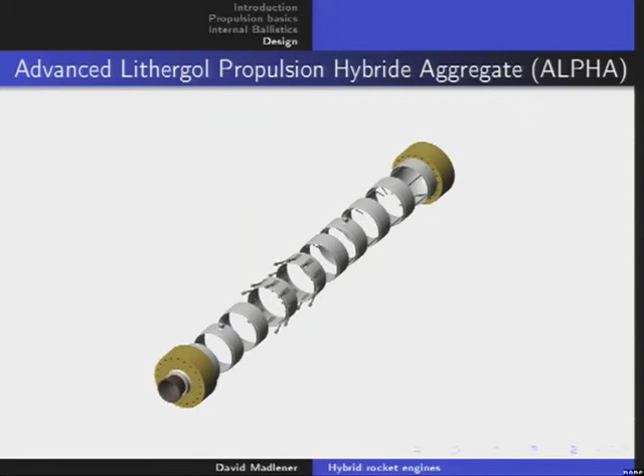Side view, view to the nozzle. This is the injector part, and this is the decomposition. We wanted to make it modular, so to change everything between tests. And this is the inner view. It's not very good visible, the contrast is very bad. Here's an aft-burning chamber, but you can't see anything. It's a problem, sorry about that.

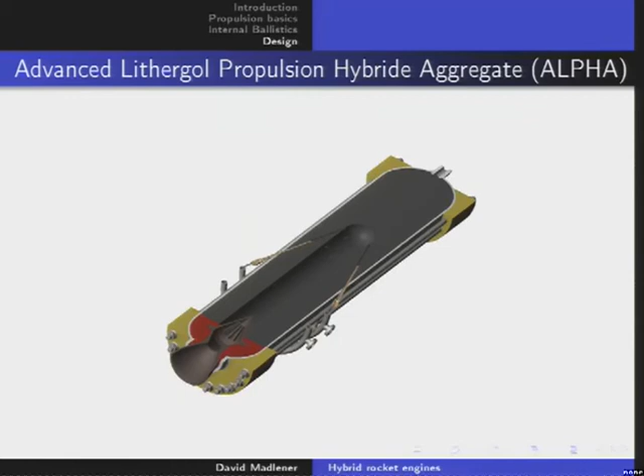Okay, this is the tank section we have envisioned. It's still not working, so you have here the dewar. From the dewar, you put the LOX into 4 tanks, and these tanks are then heated by hot water, for example. And then we have several valves and pressurization valves. And here's the real hybrid engine.

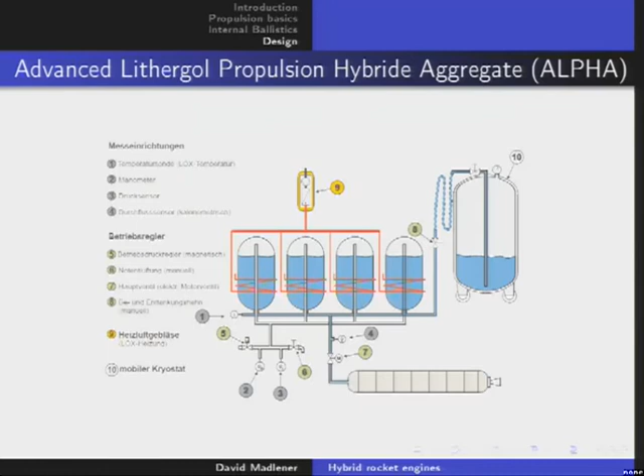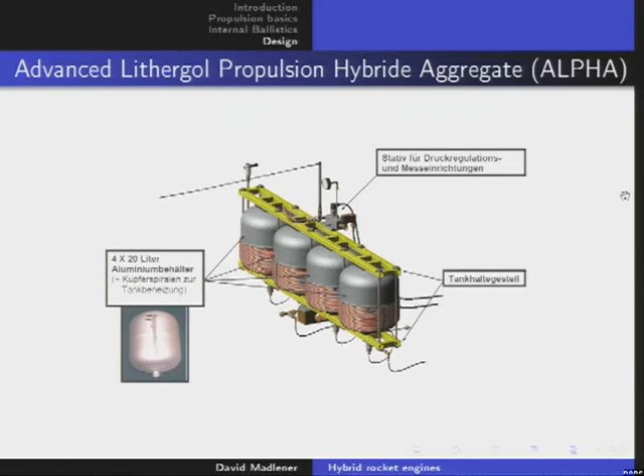So this is a view of the 4 tanks. These are made of aluminum, and you have copper tubes that will transport the hot water to boil the oxygen. And this is a view with all the sensors integrated in this tank assembly.

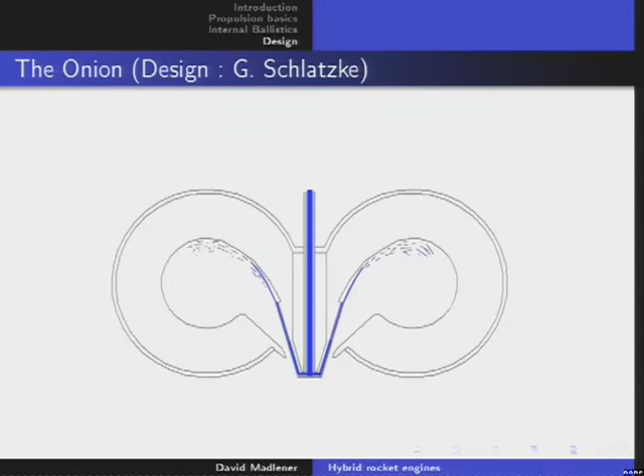So the liquid oxygen, or whatever oxidizer you choose to use, just goes down first to the aerospike, cools the aerospike, and then is injected as a liquid into the torus and circulates around. This is how it would look like. You would have a tank assembly above, and then it would go through a valve, then inject here, and there would be a burn.

Okay, this is a close-up of the aerospike, and this is during burn. So we have here very nice vorticity that would increase burning efficiency, hopefully. We don't know, we didn't test it anyway. It would increase the combustion efficiency.

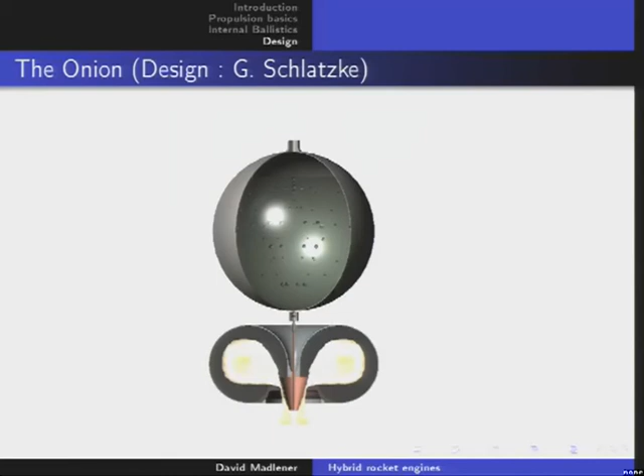And this is a possible way to make a smaller engine and to inspect the burning before building a really large engine, because this engine you have just seen would have, I don't know, about 80 kilograms of fuel and would spend over 300 kilograms of LOX at once.

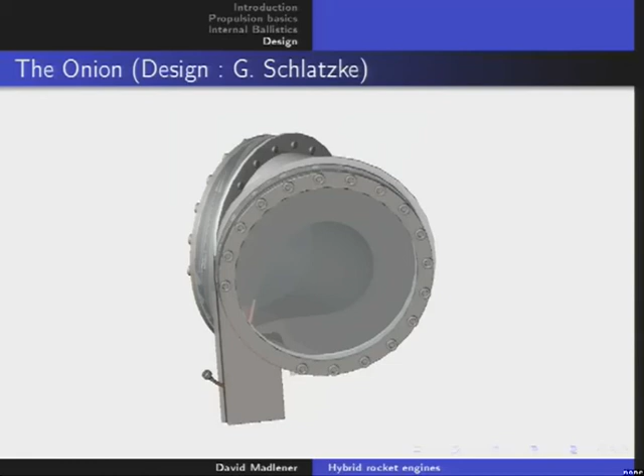So now, before I end this session, I want to show you some videos of some tests we made.

Okay, videos. So at first... okay. Nice, it's not working very well. Do you have any sound? Wait a second, I will open it with another one. So... sorry about the delay, yeah it's difficult, I know. Yeah, okay. One second, I will make it full screen.

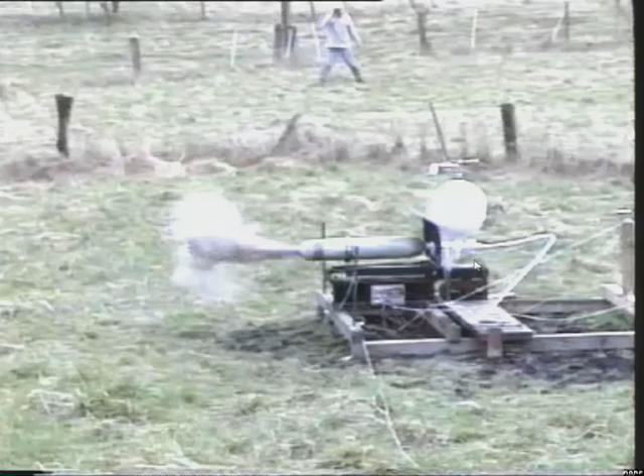So this is a typical assembly we do. This bubble here is a LOX tank, and then you have the valve below here. And this is the tanking, for tanking, and this is the engine. It has all started, so we'll see how it goes.

Thank you. Okay, but you haven't seen anything yet, wait a moment. So this is a typical scenario when something goes wrong with a hybrid. It blows up, but then it stops. Okay, then it's over. And that is why we had this shield there.

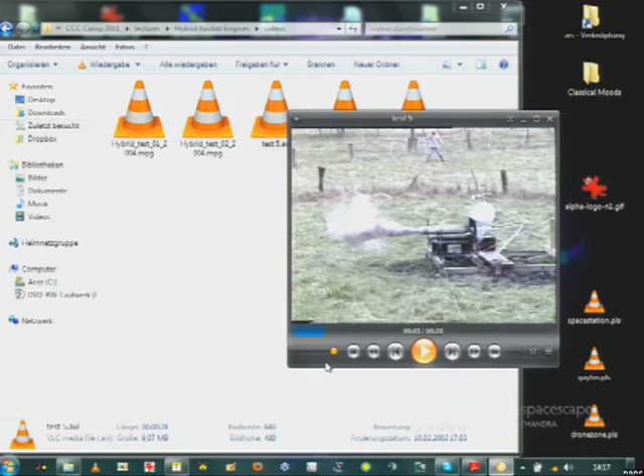We had anticipated that we would have problems because one test before something similar happened, but not that brutal. And there was another test that was not so bad.

Went quite smoothly. We used for the second time a graphite nozzle, but our injection system failed again, in another way, as you will now see.

So the LOX just burned a hole through the hull, and in the moment the pressure went out of the chamber, the reaction stops and everything is safe. So let's look at this test here.

This is my favorite, this is my favorite. You have to hear the birds before it starts. Very nice, very peaceful.

It was 10 years ago.